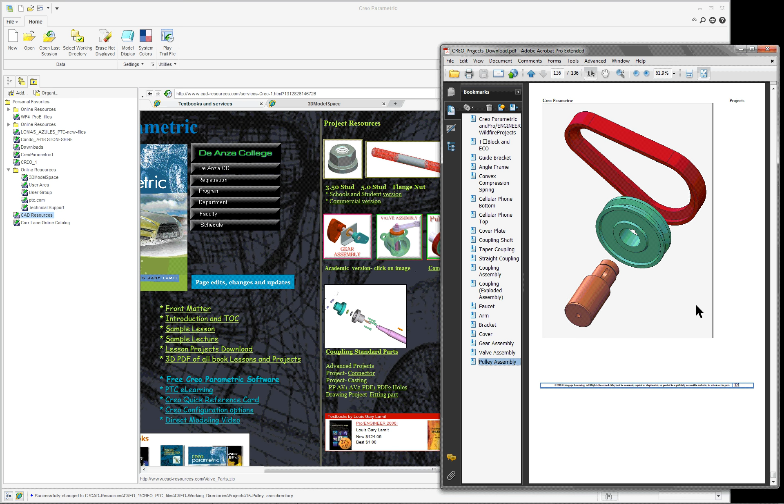Make sure you've downloaded your project files. There isn't really much on here, but it does show you what we're going to do. This is kind of a fancier version right here, but we're going to create the pulley and then the belt using top-down design.

Now I know in engineering practice that would not be normal, but this is a procedure that you need to learn, and this is the method that I chose to do it in. So we really don't need this right now. One person did a very complicated one. I can open up that. You're not required to do that for the project unless you wish.

Let's see if I can preview this. Sometimes there's a preview, sometimes there's not a preview. So this is one that what a student did that's more complicated. The only thing that's really required for this project is the pulley and then the belt here, nothing else.

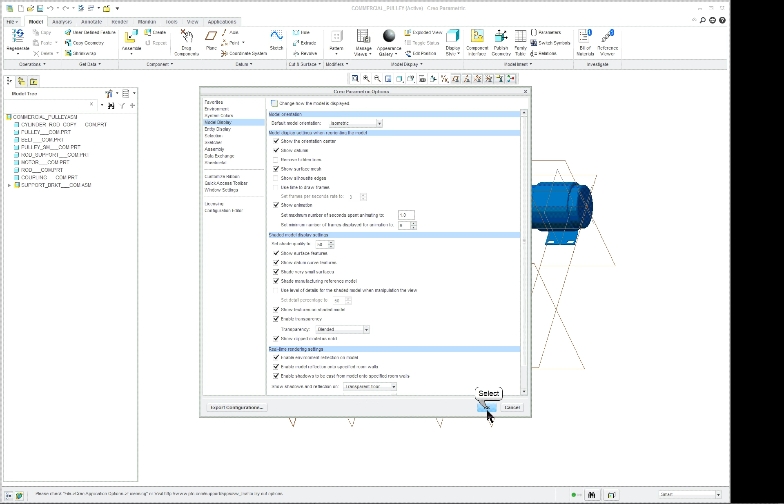So I'm going to go in and change my display to isometric, standard orientation. And I'll go in and I'll turn on all the datum tags right now. We'll turn them off later so you can see the components in the part.

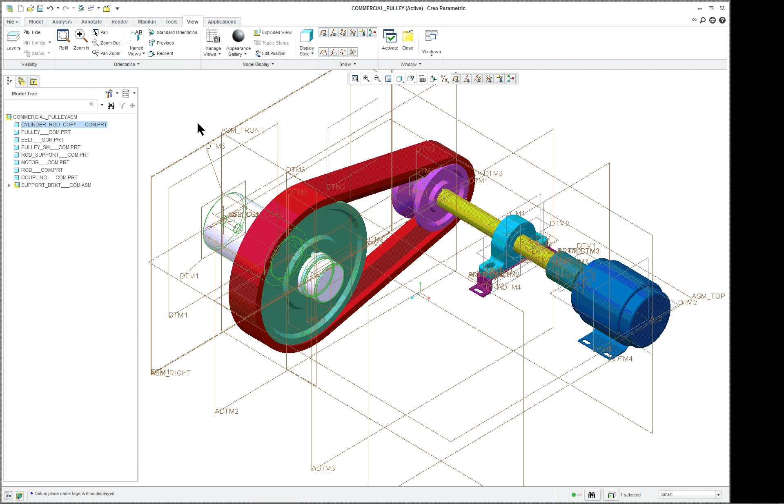Now the only thing that's given to you is the cylinder rod here, so that's the start part. I'll close it. So we're going to start a new assembly, and it's the pulley.

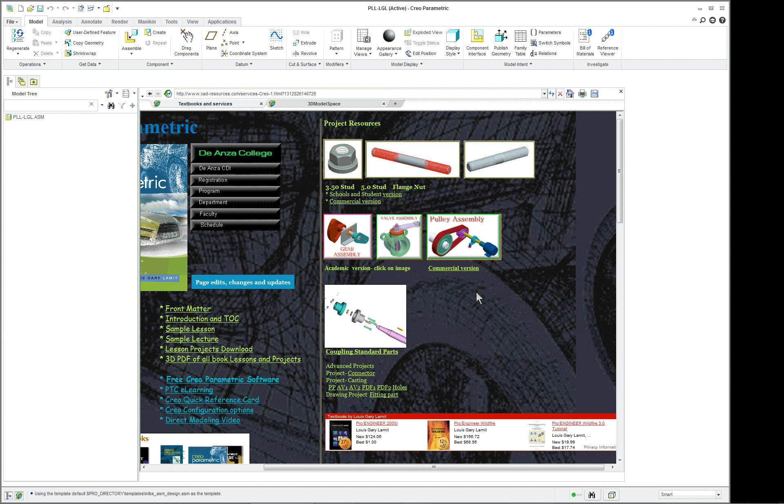Follow the steps in the book. I'll use the default template here, and I'm going to go back over and look at the web page. I'm going to click on the pulley assembly. Oh, I shouldn't have done that.

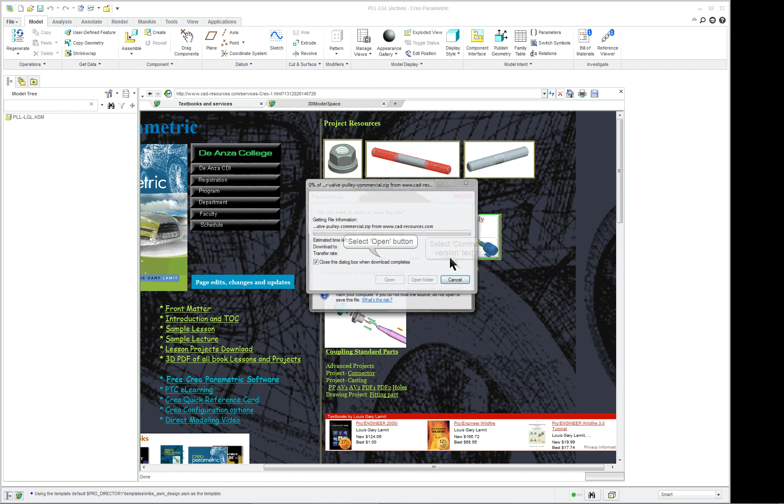I should have clicked on the I have the commercial version. Be careful which one you select. These are the academic version. And then the pulley, we'll open that up. And the only thing I really want to use is the cylinder rod. Oh, it says it's no longer listed in here. That's kind of odd, should be in there.

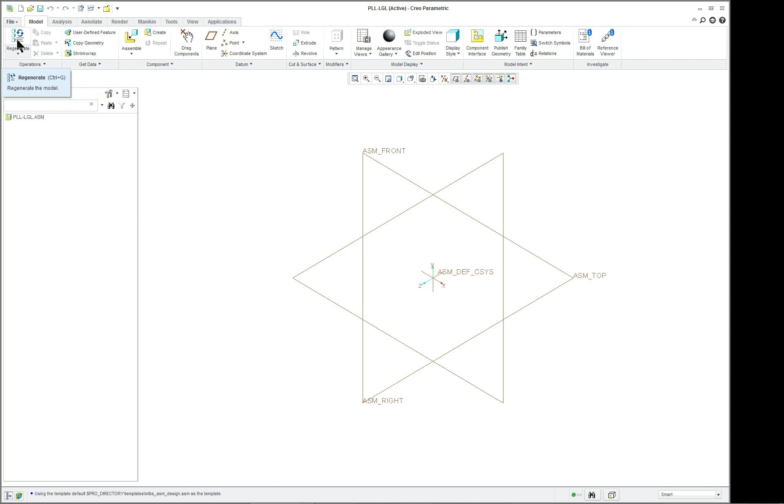I think the academic version is in there, I'll have to check that later. So what we'll do is we'll add one from here. And there's my component, and I'm going to right mouse button, default constraint, put a coordinate system to coordinate system.

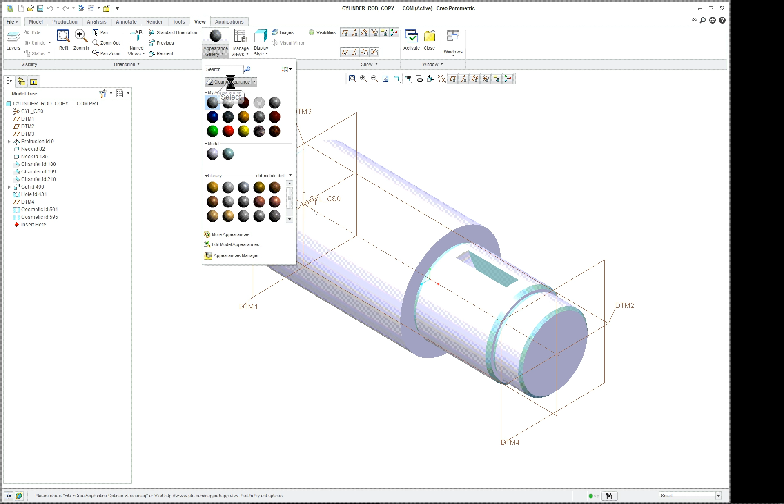And I think I'm going to go over and open up this part because the appearance is kind of sketchy on here. What I'll do is we will clear the appearances and clear all appearances like so. And then if I want to add appearance back on, I can also go in here and I can select a different type. If you have this on your system, you may not.

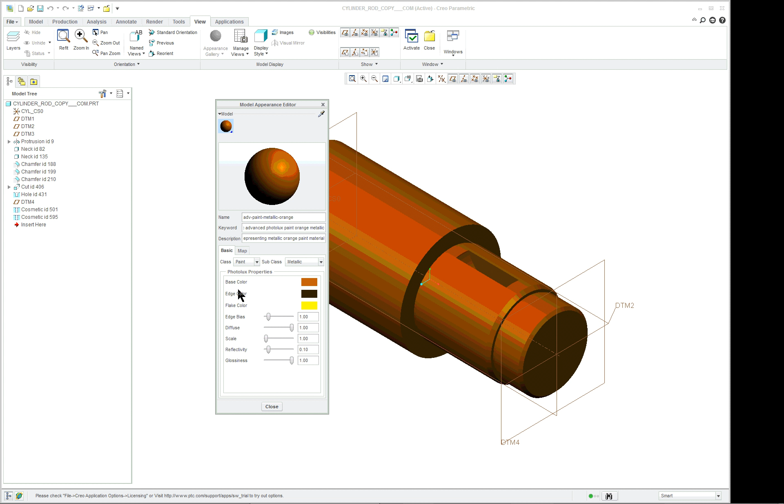And I will go in here and maybe I'll check this one here. This one's kind of a cool color, and you can see in the appearance editor it actually has a base color, an edge color, and a flake color. So it's kind of neat. And you can go in and you can actually change what you want to select here.

But I think the only thing I would like to do is it's pretty bright. It's hard to see when you have it that bright. So we'll change it a little bit. See if that works out. All right, so that's our first component.

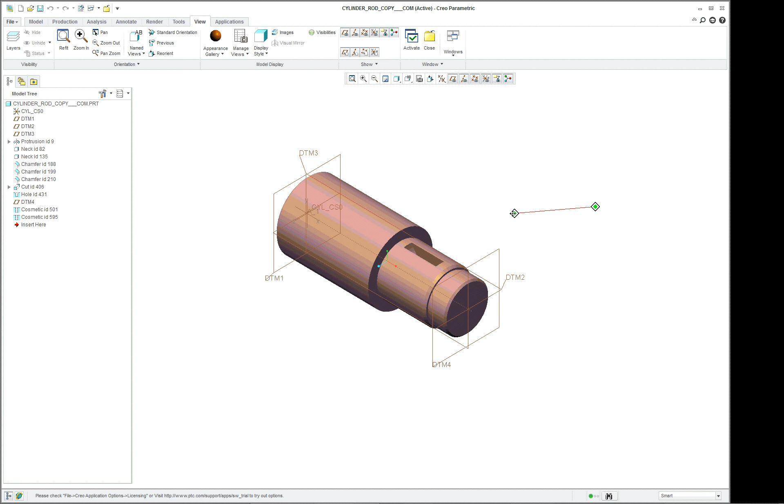We're going to make the next component using top-down design. Close my window here in the assembly. Make sure my tree filters are all on so I can see all the items in the model tree.

And we're going to do top-down design, so I'm going to create, and it's a solid part, and this will be the pulley. Give it a unique name.

We're going to locate default datums, align the coordinate systems, and we're going to click on the assembly coordinate system, and we can click over here too on the model. Now it's going to gray out everything, try and make it transparent, because what's active right now is the pulley. Of course, we only have datum planes in that for it.

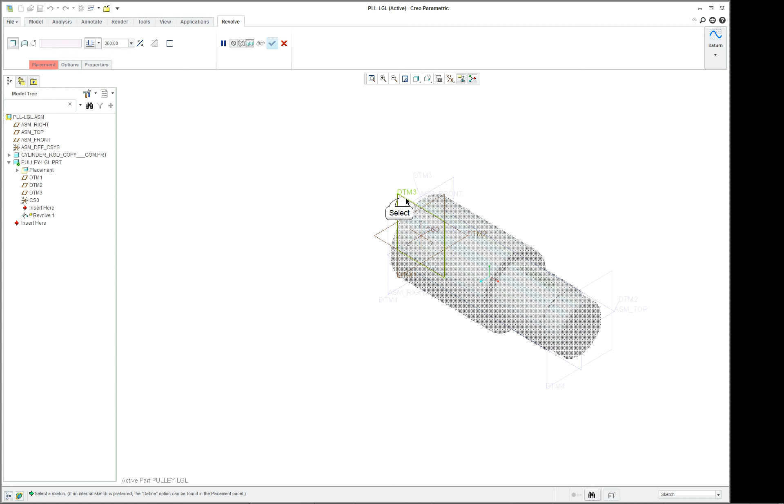Now the datum plane that we want to work on is going to be DTM3. So we're going to make a revolved part, and we're going to click on DTM3. I'll go into the sketch view, a little bit easier to see.

And the first thing we want to do, since it's a revolved feature, we want to use the axis of revolution. And we want to put some references in.

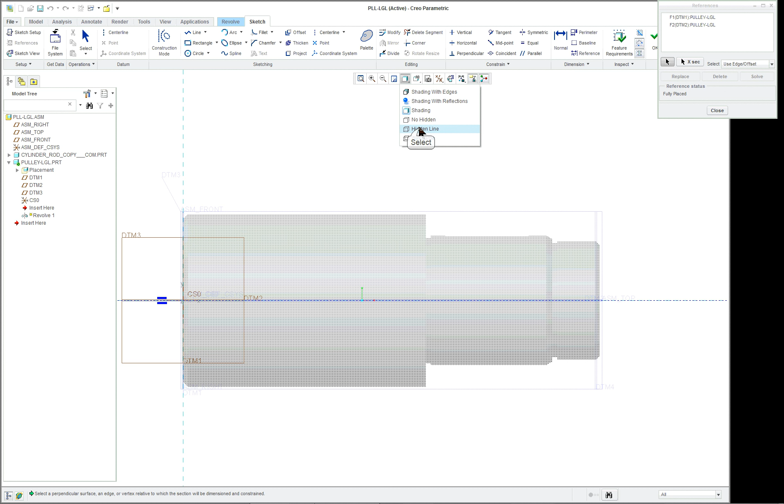Sometimes you've got to free up the cursor there. And I think what I'll do is I'll go over to my hidden line, and I want to select this as one reference. And I've got the reference going down the middle and the one over to the end, and that's probably all I need. Well, no, I'll take that back. I want to get this edge here. Now be careful, you don't want this edge here. That's where the cut for the keyway is. You want it on the top part of the cylinder, the edge, like so. So those are the only two references we really need.

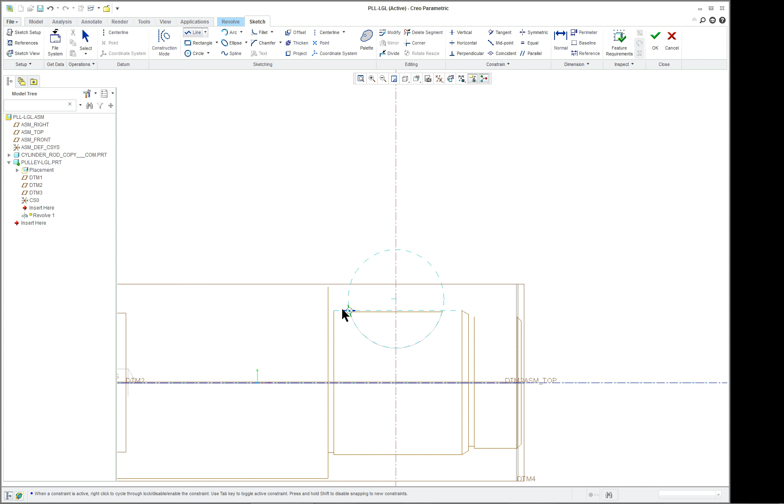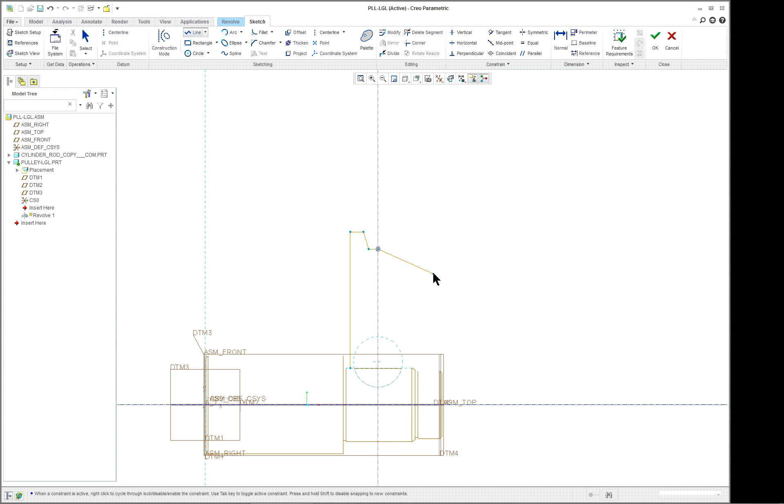So I'll move this down a little bit. And I think I'll put another center line, construction center line, in, like so. Now, I'm going to create the pulley and make sure I don't hit an unwanted position here or get an unwanted constraint. So I'm just going to click in here somewhere. I'm going to go up, and you know, you can look in a Machinery's Handbook or in another design book and find out what a pulley shape should be and use those dimensions if you really want to. I'm just going to click here, it's going to be a V belt, and only create half of it. I'm not going to worry about the dimensioning right now.

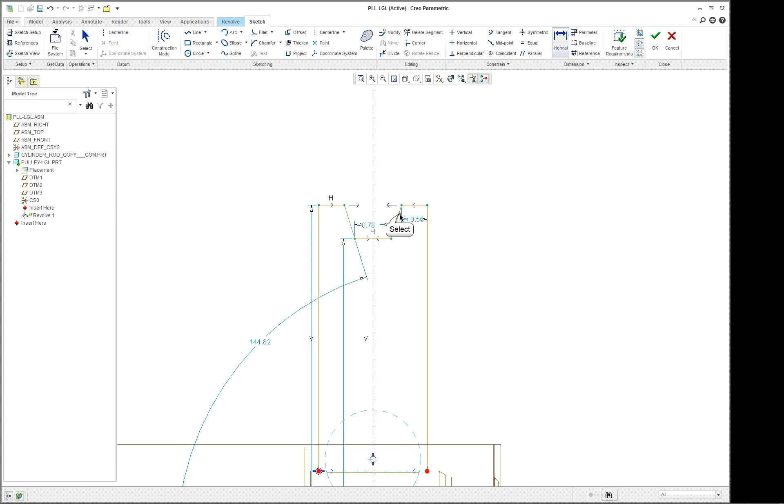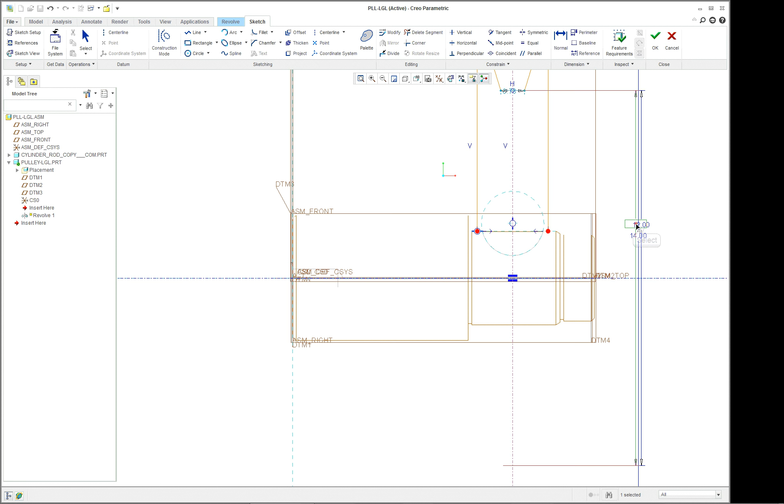So I'm going to window everything in, click on the mirror tool, and mirror it. And of course I should clean up the dimensions. Get the angle dimension here. And it would be good to have a dimension across from one end to the other here for the full thickness of the pulley. And we can leave the rest in. Got a couple diameters here. We're going to keep them. And we can make these a little bit more logical. We'll use 12, 14, just so that they're not odd numbers. And the same thing with the top.

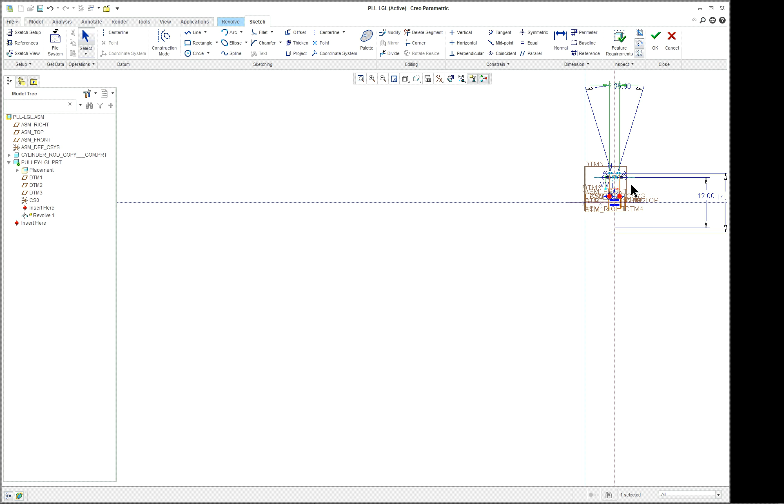And let's make this 35. I hate it when it resizes, but you just have to put up with it. And how about 2.5? This is in inches. The cylinder rod was in inches, so for the assembly, it's okay. We don't have to go change it like we did the last valve project. And we have another dimension here. How about 0.75? And again, you can make this a different size. You do not have to have it exactly like the one here. You're designing your own. I really just wanted to move this dimension up.

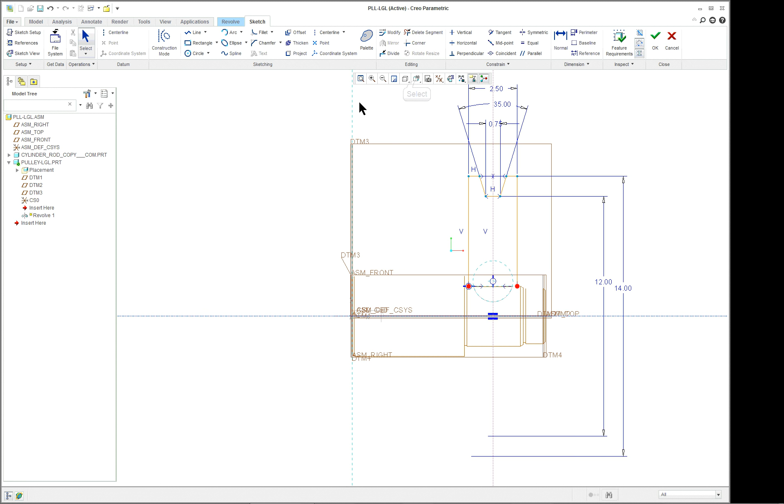Okay. So we'll go into our standard orientation. Click OK. What's wrong? Let's see. Go to shading. I want to go back in because basically I needed to have a closed section. I'm not sure why I did it like this, but I forgot to do the closure. Should have known because it should have been shaded like that. And looks pretty good. Check.

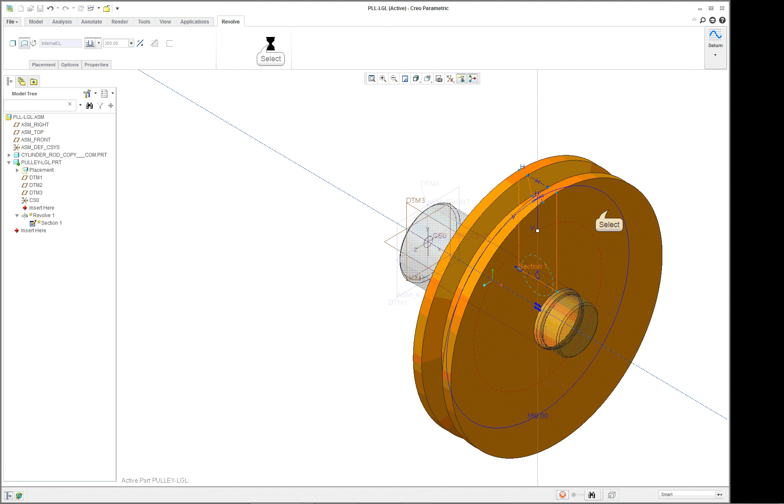And there's the pulley. Now there's some other items here that you need to do. One, we're going to cut out some of the mass on here and put a hub. And we'll put some lightening holes in here. And we also have to do the key seat. So it's still active. Let's click on Revolve, and we are going to remove material. I'm not sure why it doesn't want me to do that.

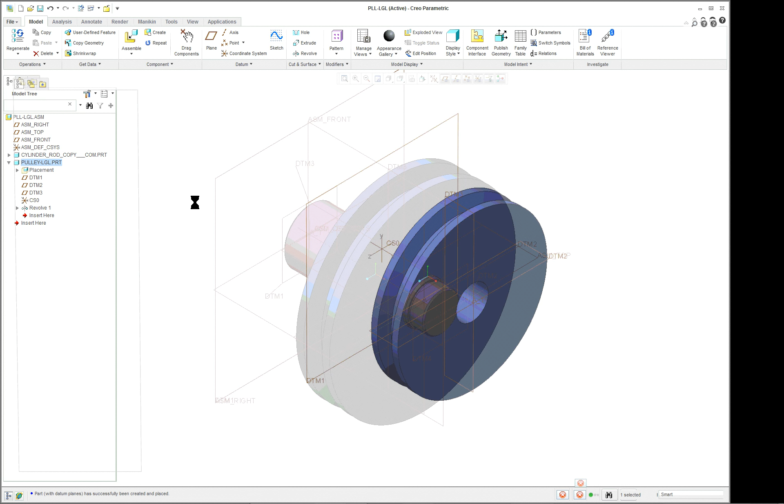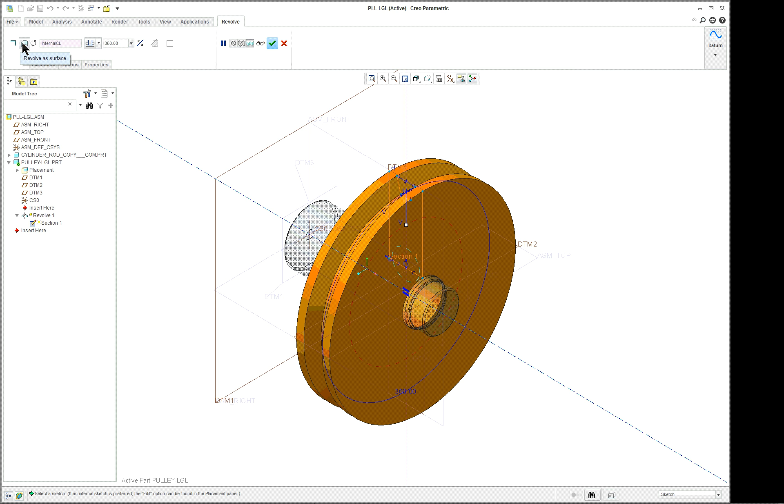Very interesting. I'm going to go back over and activate my assembly. I'm going to open up my part here. It looks okay. I can make a key seat in here too. And we'll activate it. I'm going to go in and check something. For some reason it made it into a surface. I'm going to be careful here. Because I left it open the first time, I should have read the notice. It said, hey, you've got a problem. We're going to turn it into a surface. I want this to be a solid. So that's why when I tried to do a revolved cut, remove material was not available to me.

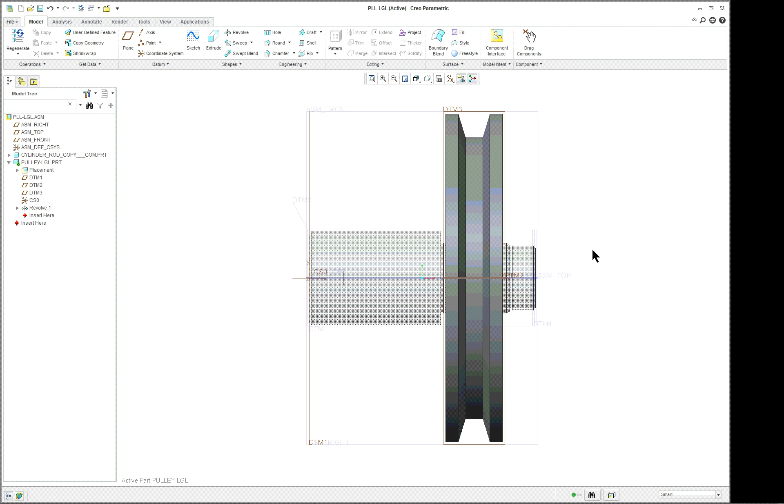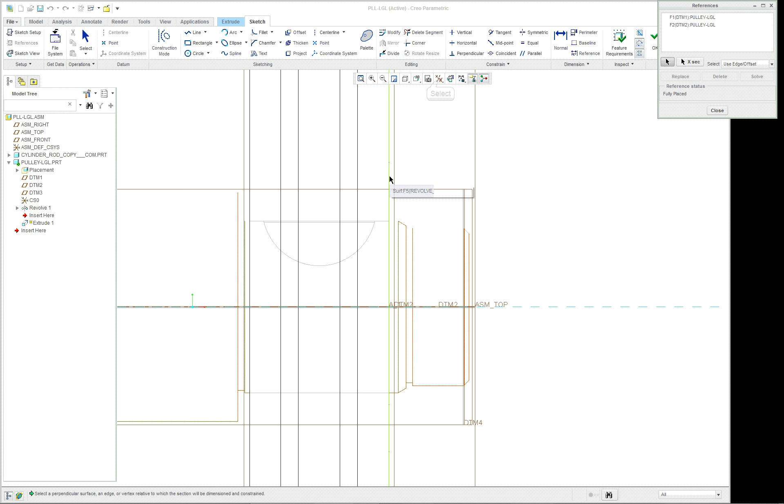And I can click here and say define. I can use previous this time because it's basically like before. See, I'm not paying attention to what I really want to do here. I don't really want to make a revolved cut. I want to make an extruded cut. So in both cases, it would have given me a problem because I had a surface before. Remove material, and I want to use this method. Let's see, use previous, sketch view, and let's go into hidden line and get some references. So the reference I want is the edge of the part. I think we're going to turn off all these features. So I want the edge of the part, edge of the pulley on both sides.

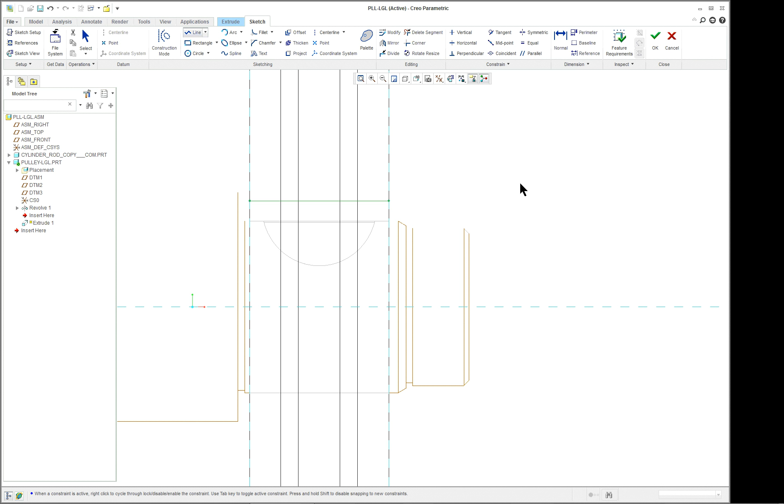And I think that's it. Let's try it. So all we want to do is put in a line from here to here. Nothing else. Then we'll go into our standard orientation, and maybe we'll turn it into shading with edges. And click. And of course we want to cut the other direction.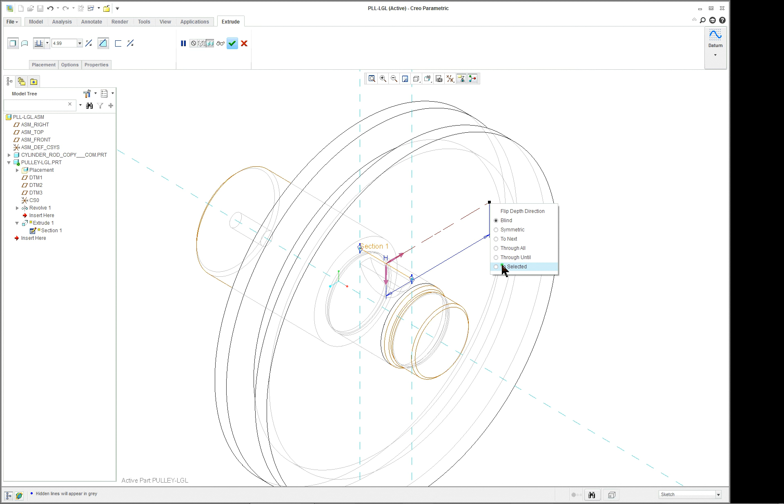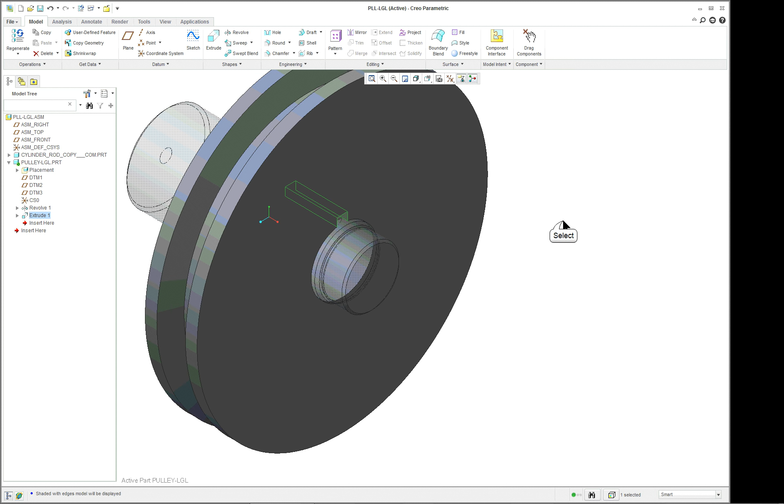And we want to make it symmetrical. Nope, let's not make it symmetrical. Let's go in and go up to a surface. So, to selected, to here, and we want to go in the other direction, to selected also. All right. There's my cut. And there's my keyway, key seat.

All right, let's turn on our datum features. Control D to get it into the standard orientation. This is still active. So let's do some other work here. Now we could do it here or we could do it in the part. Go back and forth. And in reality, I think I'm going to open up the part because I don't really need the assembly around it to do the next features.

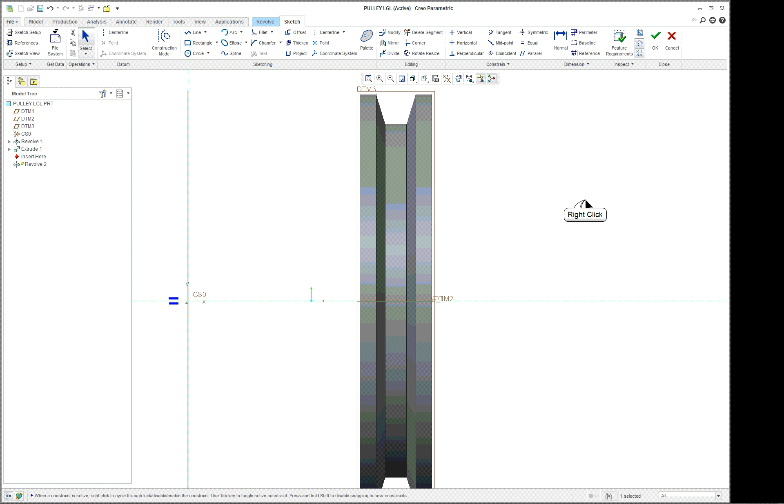So let's start off with creating a hub. I want to do a revolved cut again. And again, I can use my previous orientation for the sketch. I want to make sure I go in and start off with the axis of revolution. That'll give me diameter dimensions. And let's go to references, and we want to use the outside as a reference.

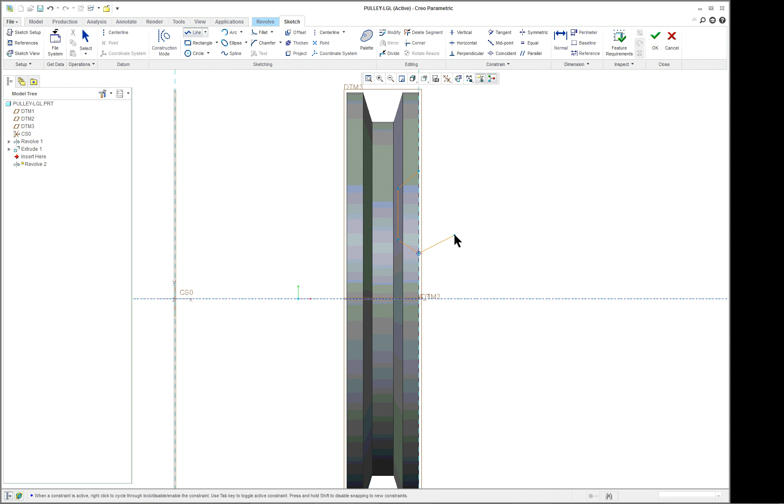Now there's a variety of ways to do this, but we're just going to cut on one side. I don't like to do the features on both sides like that. So let's create a hub. I can have an open section, but you can see I went way down here. That's way too far. So I want to get it above the key seat.

I have to make it a little bit different. I'm going to give it a check, see what happens. So I'm going to remove all that material. Again, I didn't bother to do fancy dimensioning or the correct dimensioning or sizes or anything. It's going to be your design. You can do what you want.

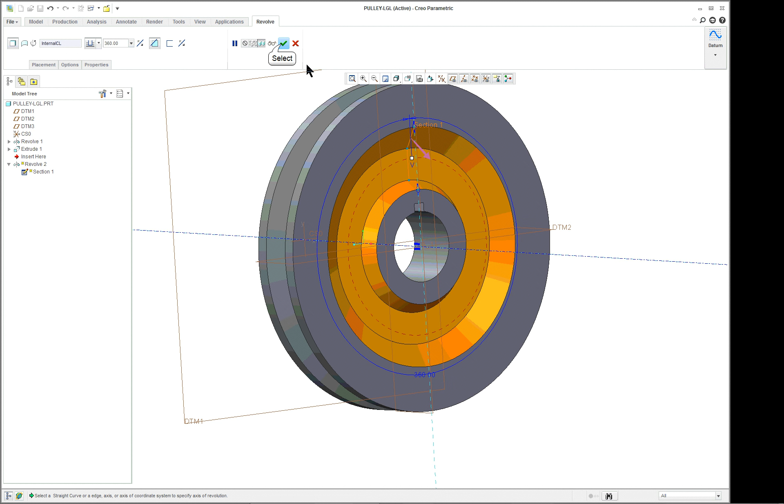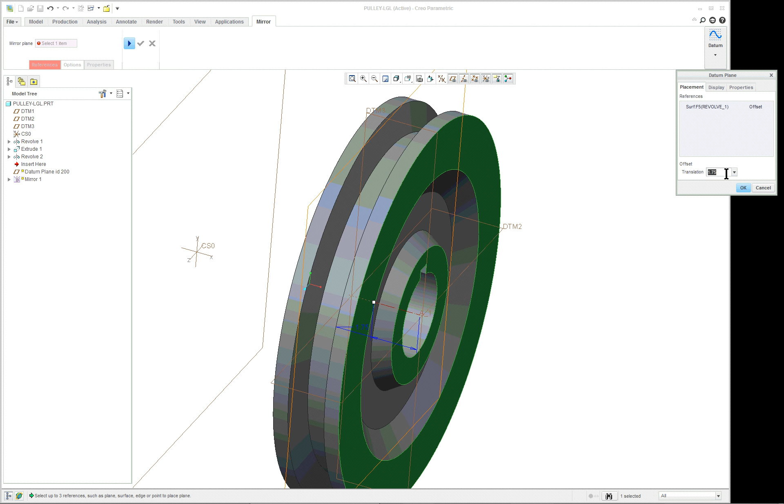All right. Now, let's say we want it to be the same on the opposite side, but I don't have a datum plane that goes down the middle. So let's click the mirror tool and click in here for datum and do a datum plane. And we're going to offset that datum plane. Can't remember how far we made it. I thought it was 2 inches. Let's see. You do 2 inches. Where does it go to? Yeah, it goes to the...

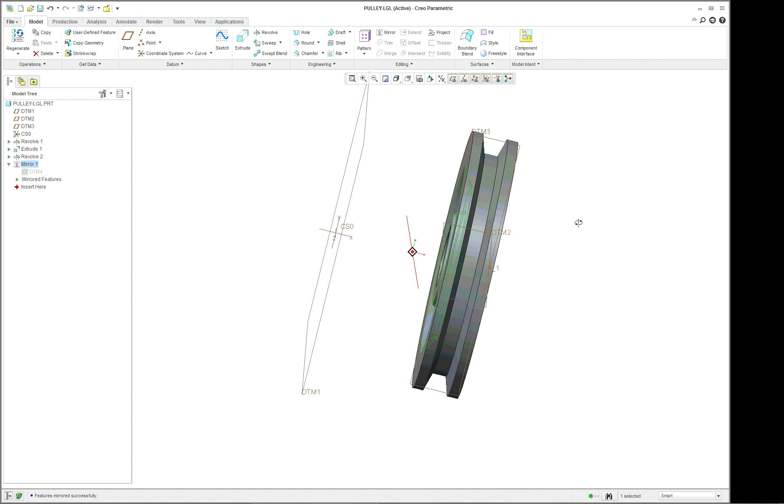Oh no. So 2.5. Maybe this was supposed to be 1.25. Let's see if it goes to the middle. Looks okay. I'm going to continue and check, and it mirrors the cut to the other side. So you can see with the mirror tool, I put the datum plane inside the command rather than on the outside where it would show up in the model tree. I have to look at it that way.

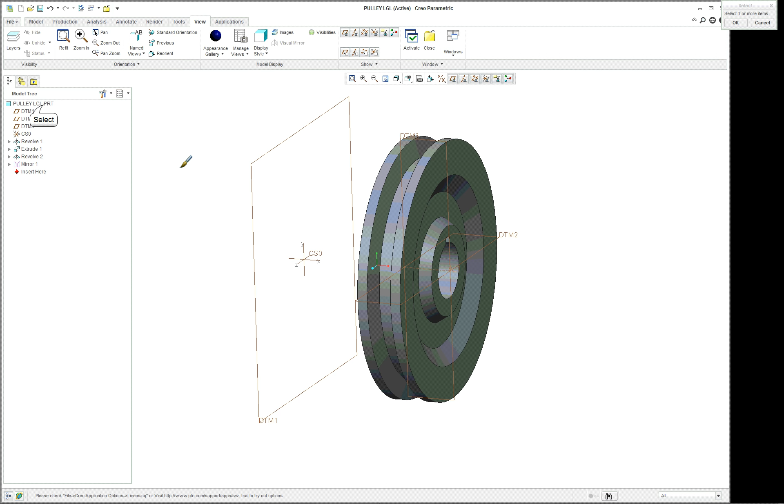All right. One of the things is let's get a different color on here. Not sure which one I should pick. Don't use dark colors. I said that, so I'm going to have to change it. Always use pastels if you can help it. Actually, I kind of like that one. A little dark.

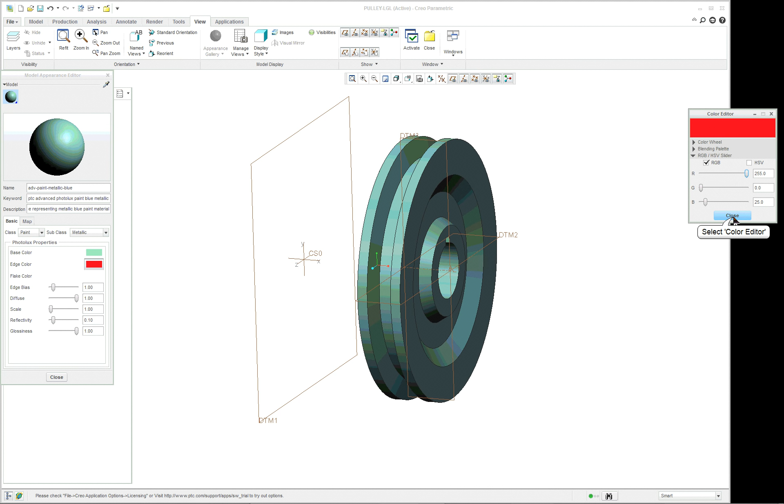All right. The edge color here, we could change the edge color. How about kind of a red? Let's see if that looks any good. Doesn't seem to change it much. All right. Now, one other thing. Let's make this lighter. It's too heavy. So I can pre-select. I'm going to pre-select in here on the face. And I'm going to cut that out with a hole.

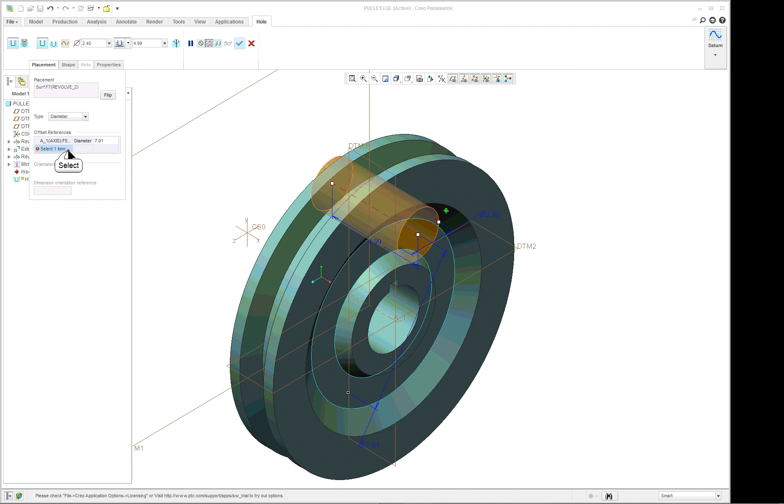And the type of hole, I want to have it be diameter. So I want the axis as one of the... oops, see, I didn't want to do that. On this face, click in here, diameter, axes, and then the other one, hold down the control key and select a datum plane. I think I'll pick that one. And we'll make the angle 0. And I think we should make the size considerably smaller. 0.5.

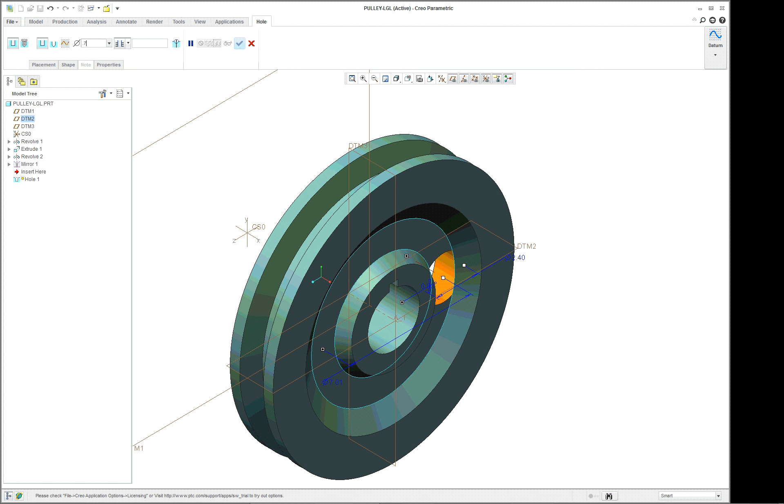Oh, sorry. Through all. About 0.75. Oh, kind of small. You'll just eyeball it. I want to remove some of the material. That looks okay. And again, you can make the dimensions better than this.

And while I'm there and it's selected, let's pattern it. And we're going to use an axial pattern. So it depends on what you want to put. If we just leave 4 in there, it makes it a little bit lighter. And again, you can increase the number there. Put them all around. It's your design.

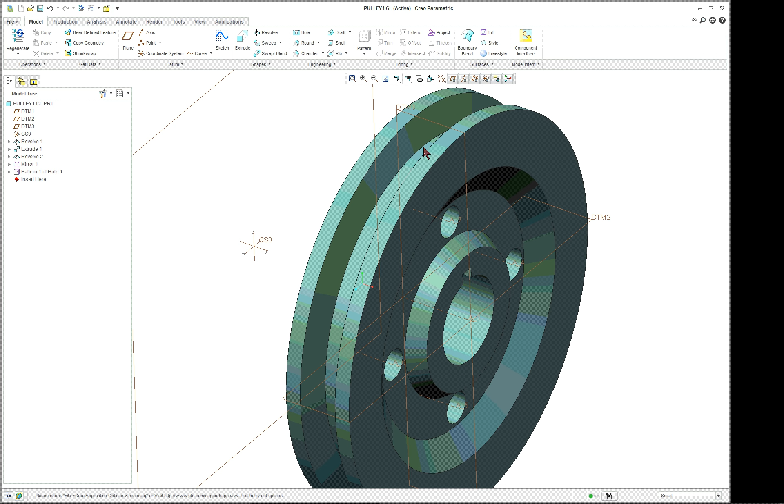You can put some rounds on here. I definitely would stick some rounds up here in the belt area if you wish, but maybe you want to do the belt. If you don't want to put them in, fine, but if you do put the rounds in here, you're going to have to use that when you create the belt. No big deal. So close that.

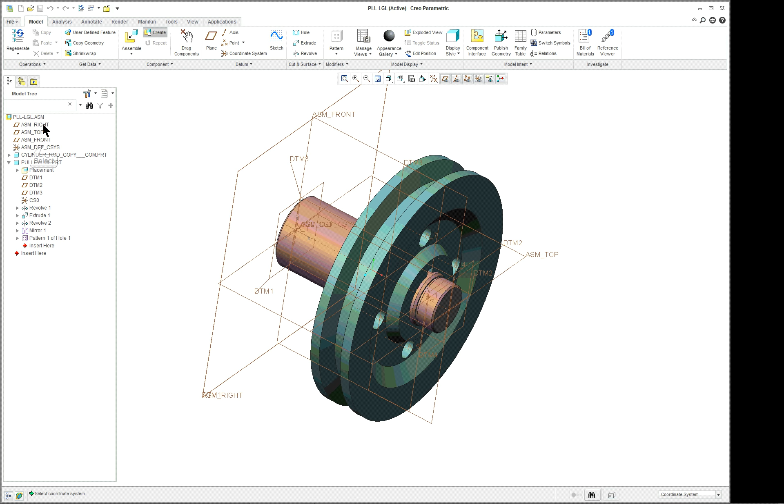Go back over to the assembly. And we're going to do the pulley. Sorry, the belt, but we're going to use the pulley to control it. So this is going to be another top-down design, so we're going to hit create, and it's going to be the belt. It's a solid part. And we will locate the coordinate system again. Default. And you can see the features here.

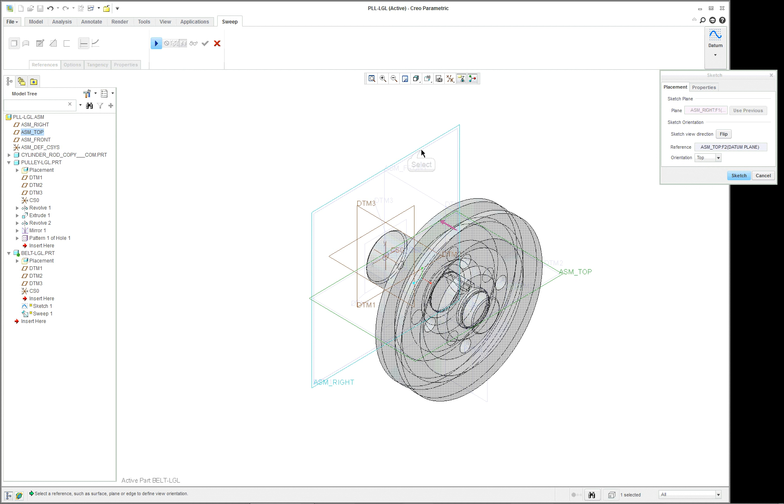Now what we want to do is we want to create a trajectory because we're going to make a sweep. So I'm going to click on the sweep tool, and it's looking right now for the trajectory. So I'm going to go in the datum here, and I'm going to select my sketch tool. And I don't have to go down where the actual feature is being created. I can do anything parallel to it. So I'm going to use the datum plane here. Sketch, sketch view,

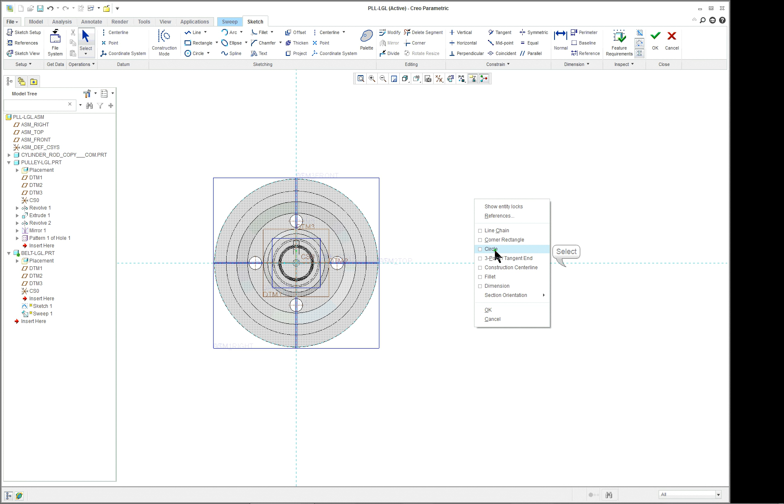and I want to get my references in here correct. So I will have this as a reference and the outside. So I got the diameter. So let's start off with some geometry. I'm going to put a circle over here, and I'm going to put a circle here, but it's going to lock in, so there won't be any dimension on this circle. It's locked in as a reference. Of course, I can't create anything with it like it is right now. I need a trajectory, so I need to add some tangent lines.

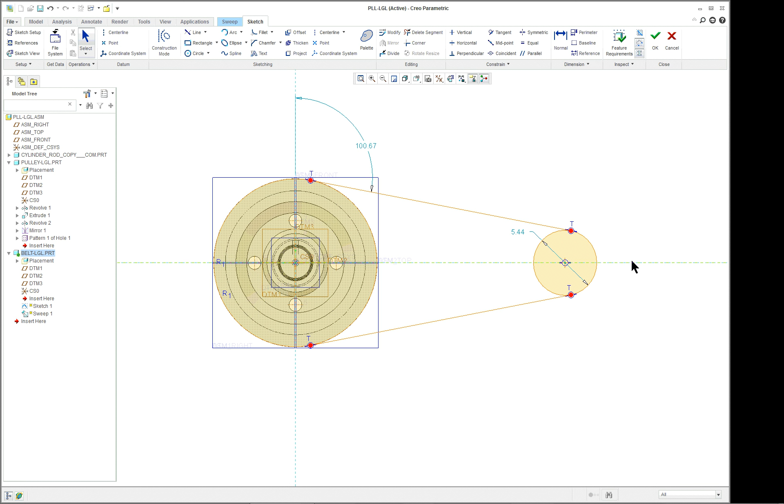And I need to remove this inner arc on both sides. Delete segment, and I like to just draw through it. You can click on it instead. And of course, here if you want to make some changes in the size, like so. And I think a dimension between the center here and here. If I had made that other one strong that was already there, I wouldn't have to add it now. And let's make this 20 inches. Just make it a little bit farther away.

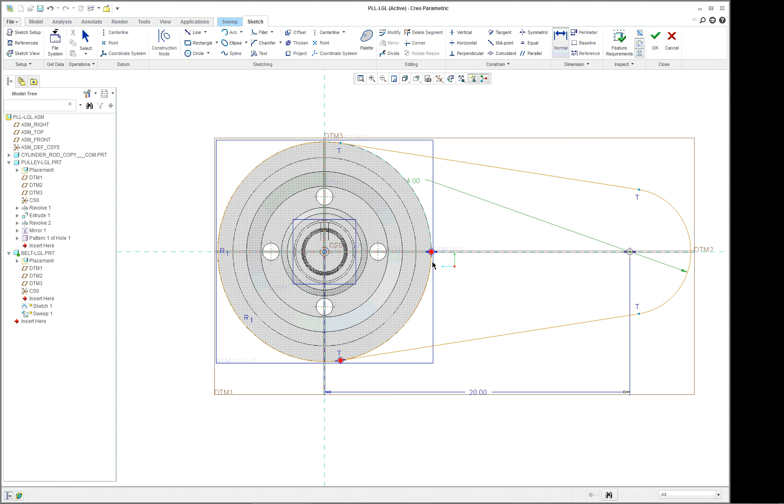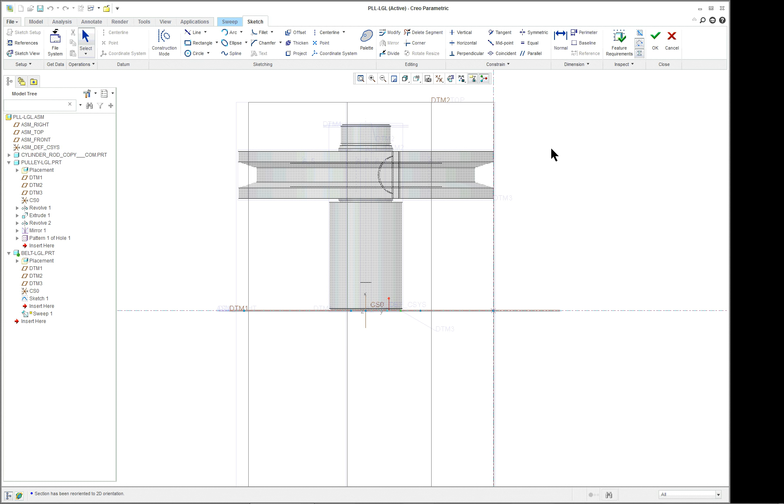And it looks like I didn't get all the arcs out, so I need to delete this. So there's my trajectory. Check. Continue. I can reverse this and look in that direction if I want. Now I'm going to click on the sketch here and go into my sketch view, and I'm going to be looking down the end of it right in here. So I'm going to use all external references.

Again, I know you wouldn't do this in industry, but you're just learning the process here. You just buy a belt or look up the size. In fact, you can look up the size if you want to see what a real belt would be. Just go online and find a belt and then replicate the size on the pulley and then use it to create the belt here.

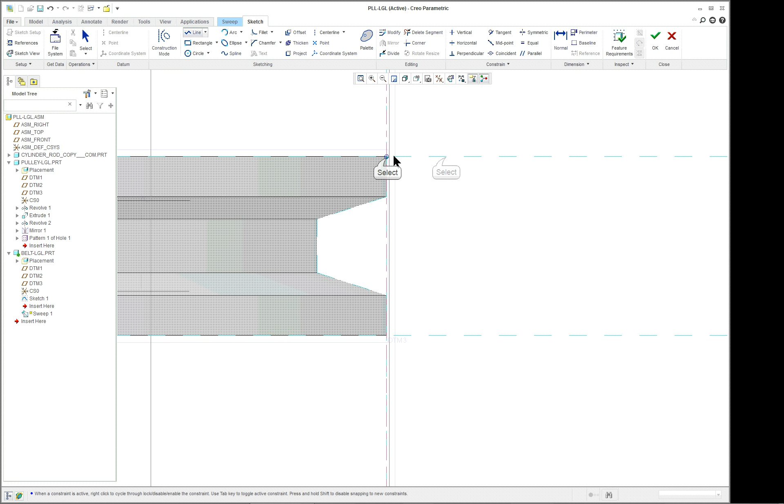I used all these as references. So I'm only going to need one dimension when I'm done here. Or I should say only one dimension will display as a design dimension. And that's this dimension here. You can do whatever you want. It's your design. So go into my standard orientation before I check. You can see here's the trajectory way out here, but it's just going to sweep this section along the direction and distance of the trajectory, not along the actual line over here.

Looks pretty good. I think we will activate the assembly and open the belt. Let's see what else we can do here. How about miscellaneous? What do we got in miscellaneous? Rubber. Let's use rubber. I know a belt probably isn't rubber anymore. Alright, so there's my rubber. Again, if you want to go darker, you can, but this is fine, I think. The other thing is, let's auto round it. Just a small amount.

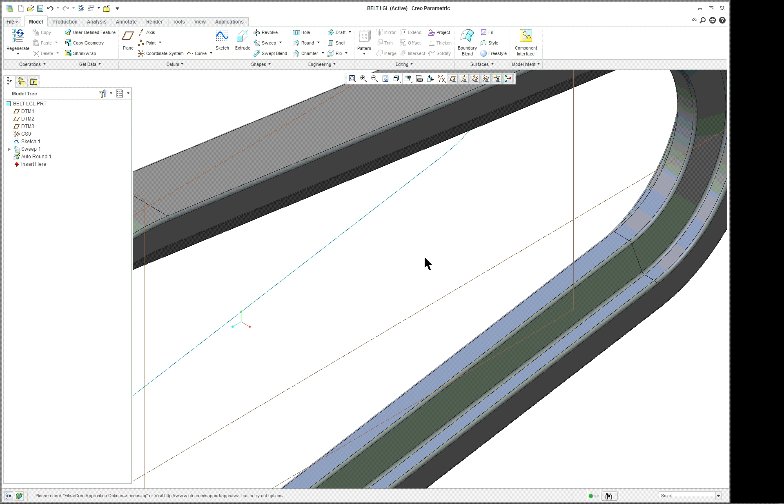And there's my belt. All right, so let's close that, go back over here, and then we have our belt. Now you can design a key if you want, top-down design. And you can even come over here, and if you're going to do this, I would use the datum plane here and then start off by sticking in an axis.

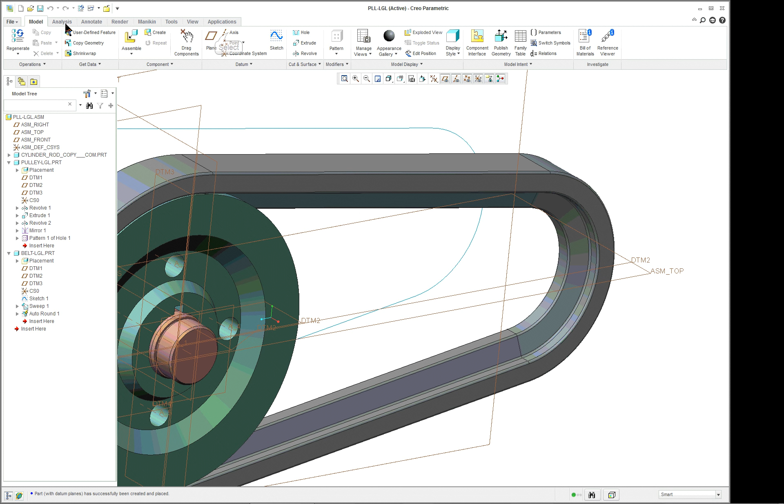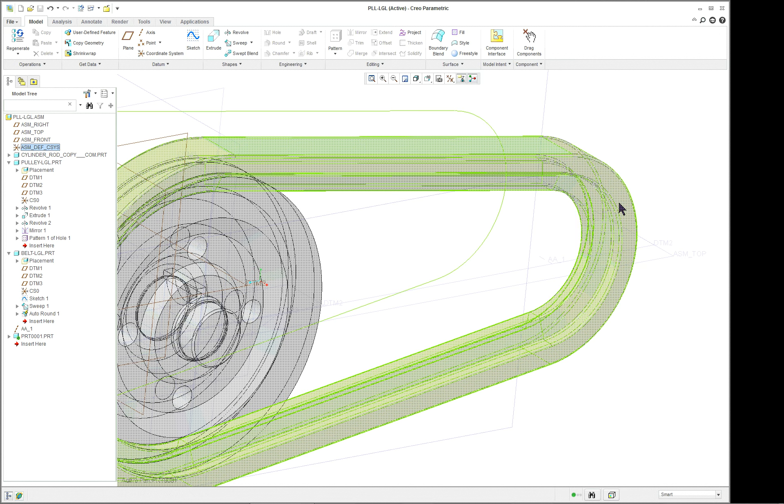There's the axes. And you could use that axis to create another component. We'll do the same process as we did before. I usually don't bother to cover this one, but we can. So we're going to use a revolve solid, and we're going to sketch on... oh, I shouldn't have clicked on it. I should have just... okay, it is the one that's parallel here. I want it to be parallel through there.

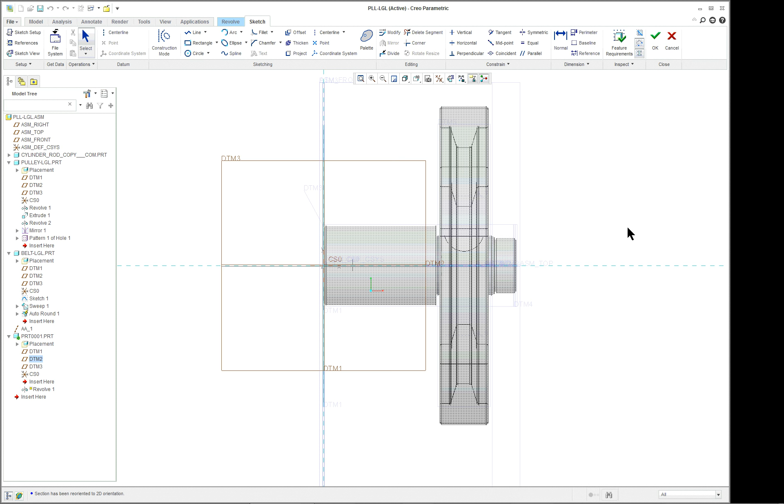So that's okay. Let's see. Yeah, it goes through the whole part in that direction. That's what I wanted to do. Lucked out. A little hard to see here. Axis of revolution. And then we're going to sketch. Well, actually, I didn't want to do this. I wanted to sketch in the other direction. So I wanted to use these references over here.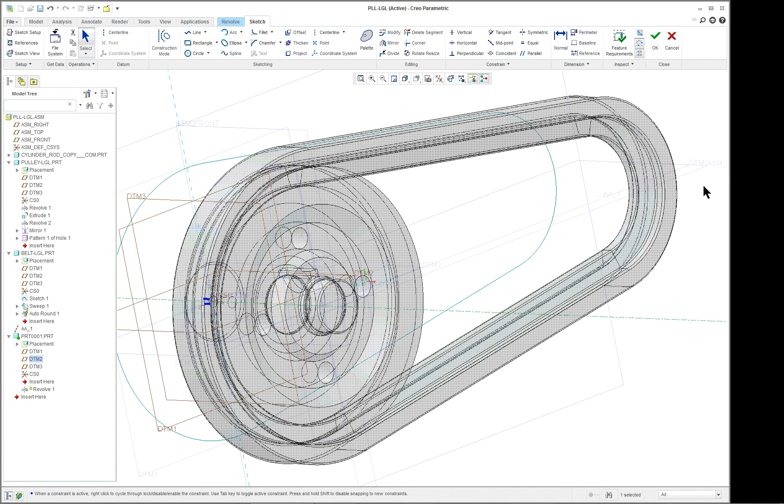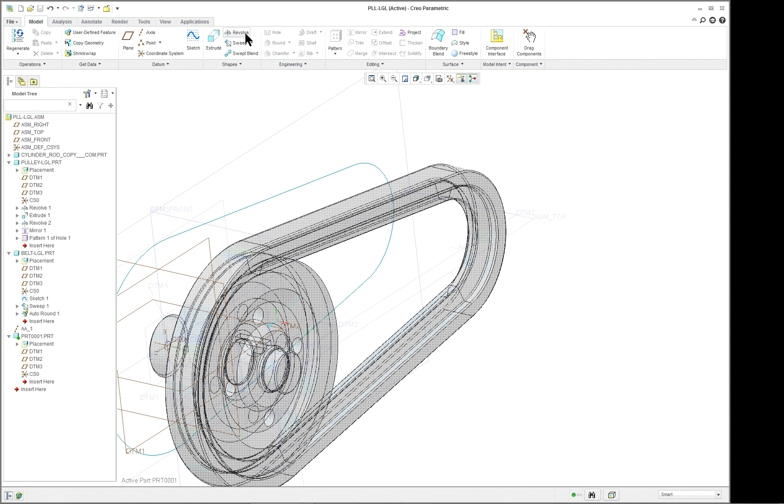So I'm going to cancel this out. Go back over. Basically, I want to cut through here because I'm going to want to pick up that. I sketch on this datum over here, parallel. I'm not sure why it didn't give it to me, to be honest. It should. Click on revolve. It's the datum down the middle. I think I'll go over here just to select this datum.

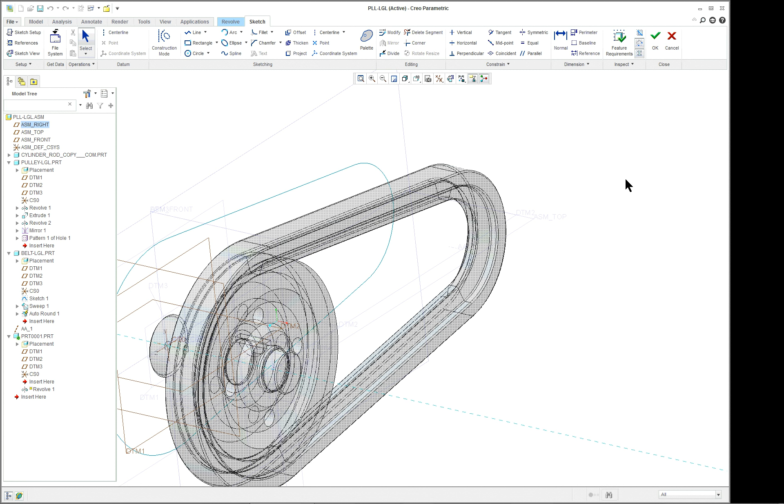Sketch. There we go. I don't know why. I must have picked the wrong one last time. All right, so let's go to hidden line. And we're going to use some references. And we want this axis to be a reference.

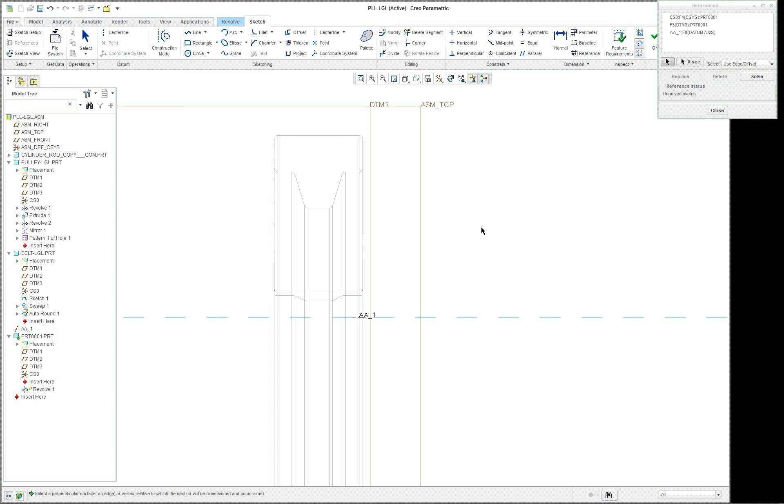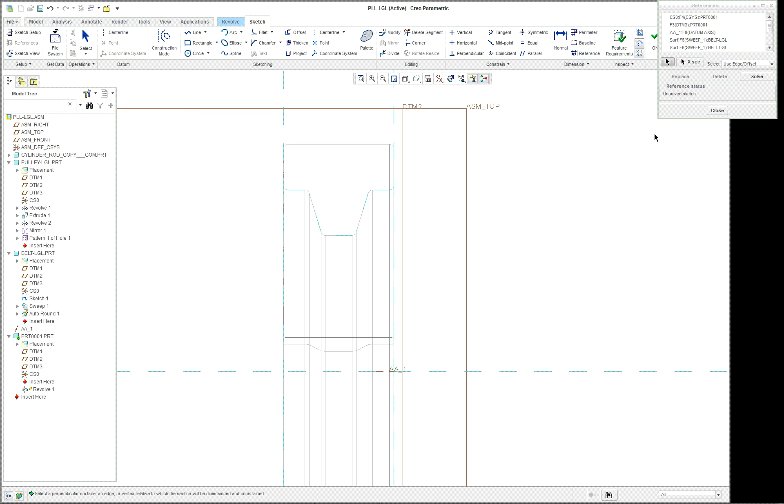I'm going to look closely at this. So let's try using these as references, like so. And we have our axis of revolution. And then we have our geometry. Let's see if we can get this right. We will go in and do the actual complete geometry here.

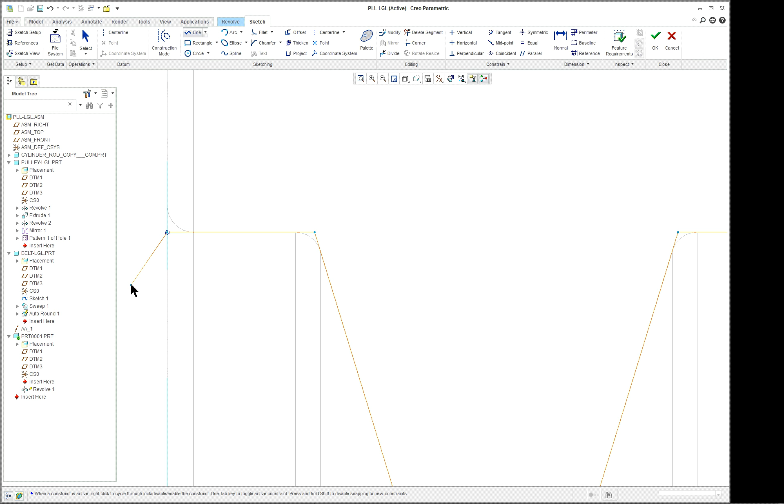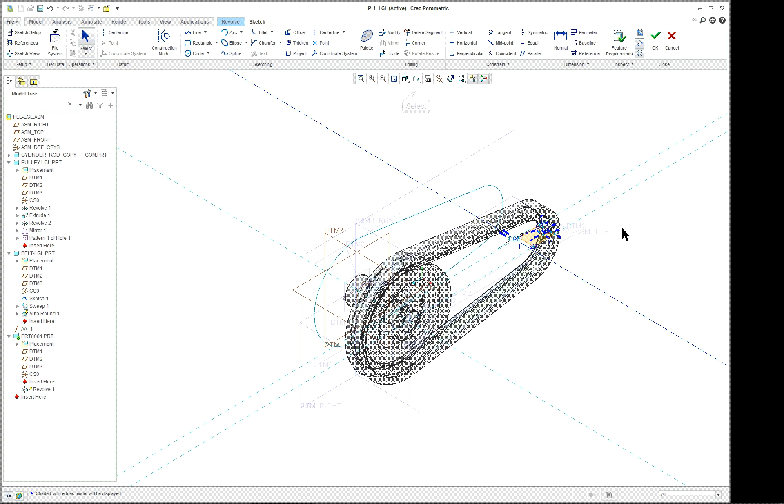You'll see that it goes to the intersection point if you zoom in. We don't want to use those rounds because they're part of the belt. I hope I'm doing this right. Hard to see, truthfully. All right, this is the hole. Maybe I'll make the hole smaller. So I hope it's going to work. Let's see what happens here. Check. Kind of lucked out. Could do even more in here, you know.

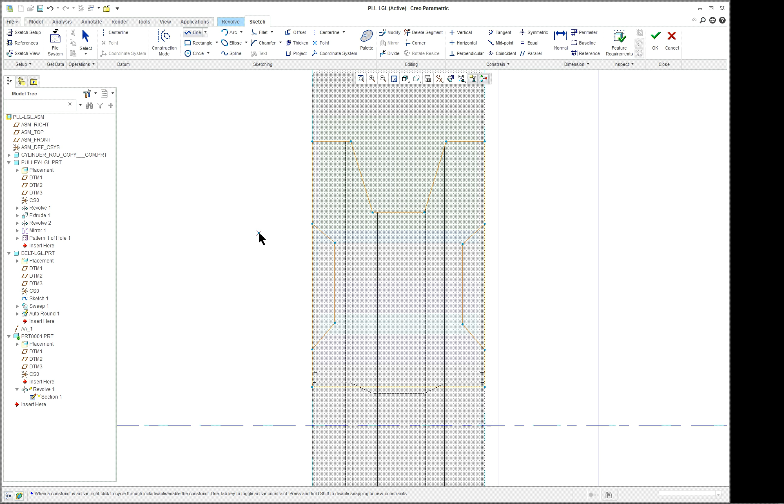What if we wanted to do the whole thing at once? I don't really like doing this, but I should put a reference across here, but I'm getting lazy. Could mirror it also. And we need to delete out some segments. And again, you should maybe align these, do something to make it look better, or maybe I should have, like I said, done the mirror. But you can get this to work a little bit better.

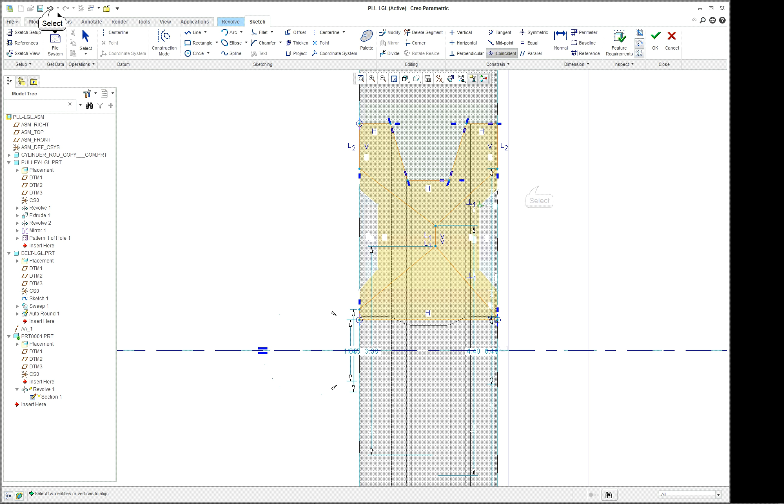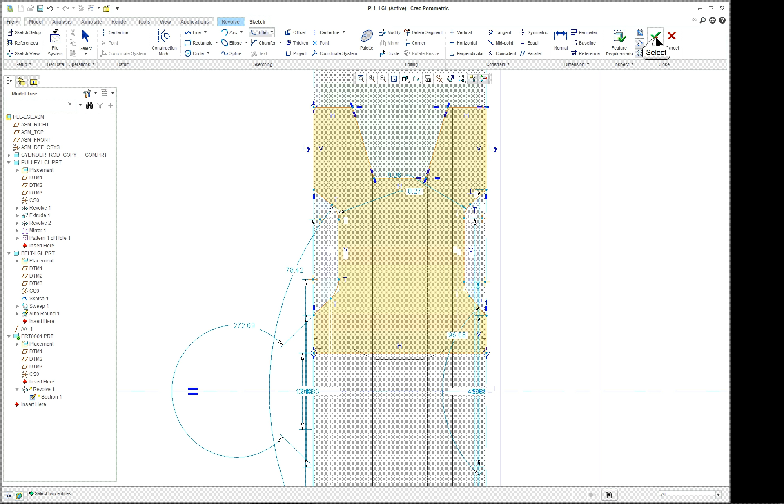I want to align it. I want these to be directly across. I could put a center line in there. But again, I'm just going to make both sides a little bit different. You can also get really fancy, or I should say complete with it, and you can do a lot of rounds and everything. But again, you want to make both sides the same, and you want to change the dimensioning. You should do one and then mirror it in the sketch if that's what you want to do. Check.

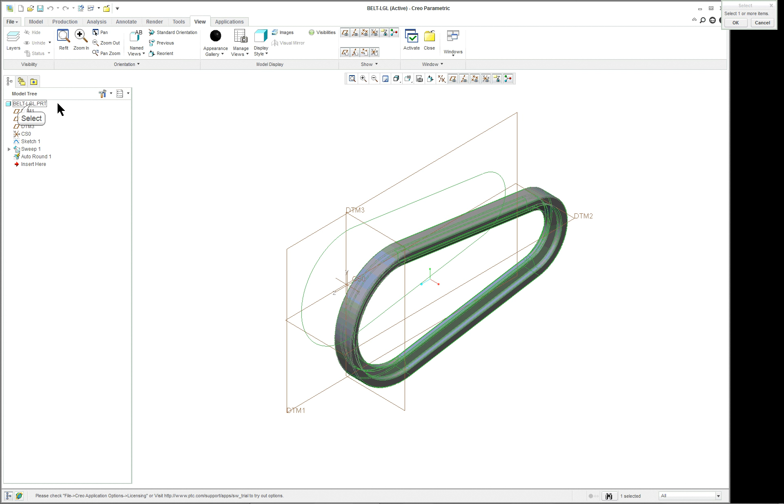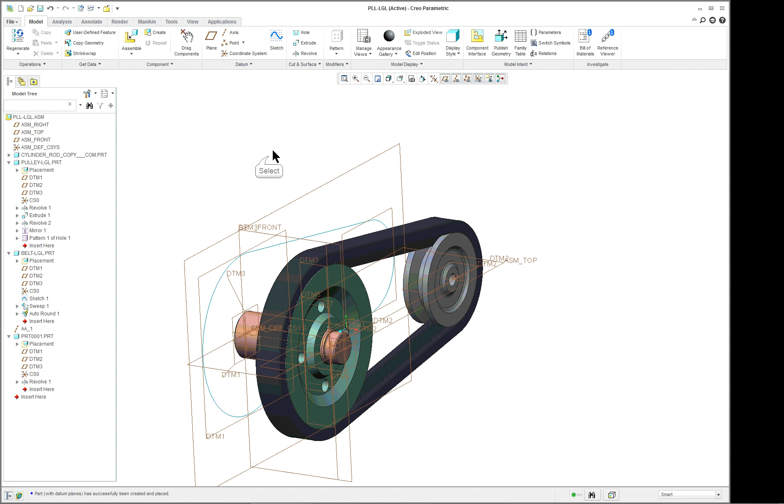And activate the assembly. Save your part. I don't like the color of this rubber. Pretty dark, but I'm going to leave it. No, maybe not. Let's see. And close it. And of course, I'd do the color on the other one too, but I'm not going to bother. All right, so you don't have to do this one as part of the project, but I would do all the rest. And you can even do more like we were showing in the very beginning with the other assembly.

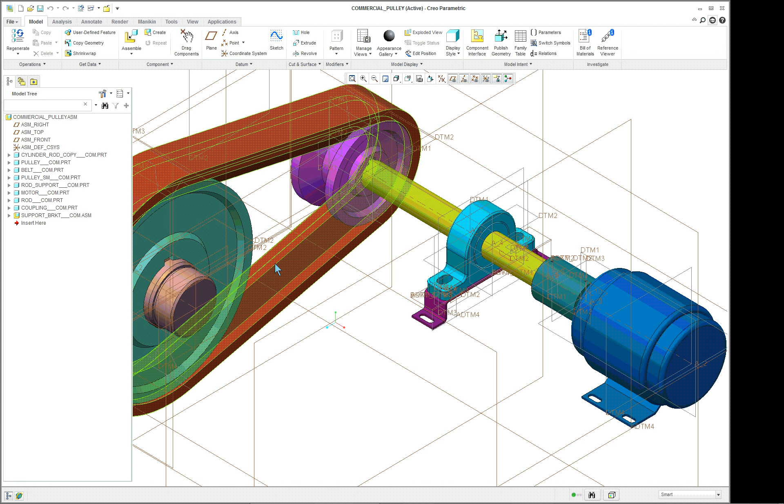This one. This is a pillow block. You can go and get the bearing off the internet or through some of the Pro or Creo library or the company library. Probably find one that you can just download. This is a motor. And again, you don't have to do all this, but you can see the person did a nice job. This concludes the third assembly lecture for the Pulley project.